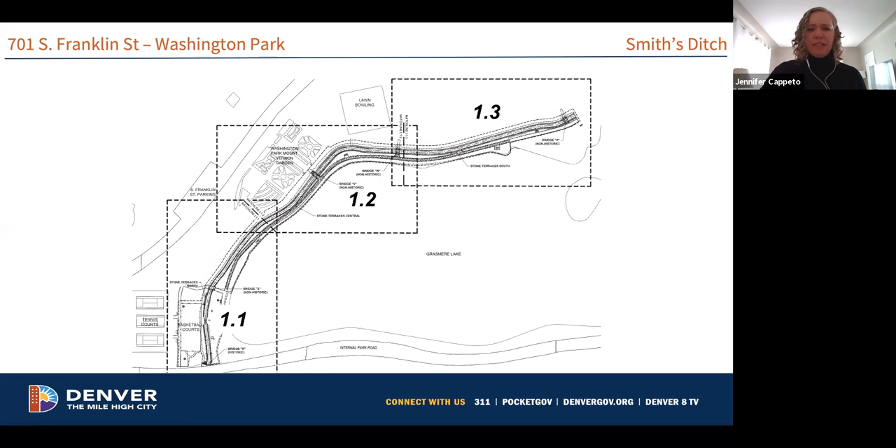Hi all, my name is Jennifer Cappeto. I'm a project manager with Denver Parks and Recreation, and I am the project manager assigned to the improvements at Washington Park for the city ditch.

And just real quickly, as Jennifer mentioned, the bridges are not historic. Bridge S, the one that you see in the top left, was designed in 1993. I don't have the actual construction date, but it was probably late 1993, early 1994. This form of bridge construction has worked out really well for operations, and it has been used as the design intent for the other 3 bridges being replaced as part of this project.

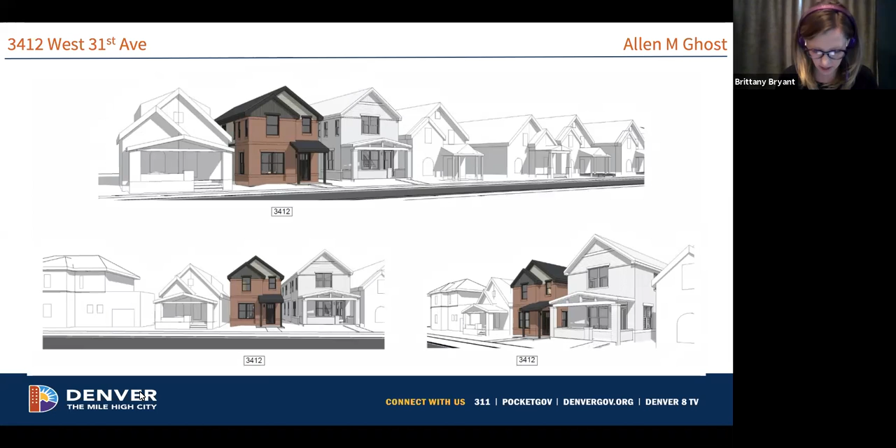Since the phase 2 submittal, the applicant has restudied the overall structure height. It was reduced from 28 feet 4 inches to 27 feet 5 3/4 inches. The pitch of the roof was reduced from a 10/12 pitch to a 9/12 pitch. The second floor plate was reduced from 8 feet to 7 feet 8 inches.

The porch roof was revised from a flat roof to a shed roof, and the plinth on the porch column was eliminated from the design in favor of a simple porch post.

The ground floor windows have been revised from a group of 3 to a group of 2. The second floor windows have been revised from a group of 2 to 1 single window, which is typical of the nested gable forms within the Allen M. Ghost Historic District.

Additional horizontal banding has also been added to the structure, as you can see in this rendering, and we'll look at it in further detail in the elevations. Landmark staff feel that the adjustments to the design have created a new infill structure that is compatible with the mass and scale of the Allen M. Ghost Historic District, and does meet the commission's conditions from the November 3rd meeting.

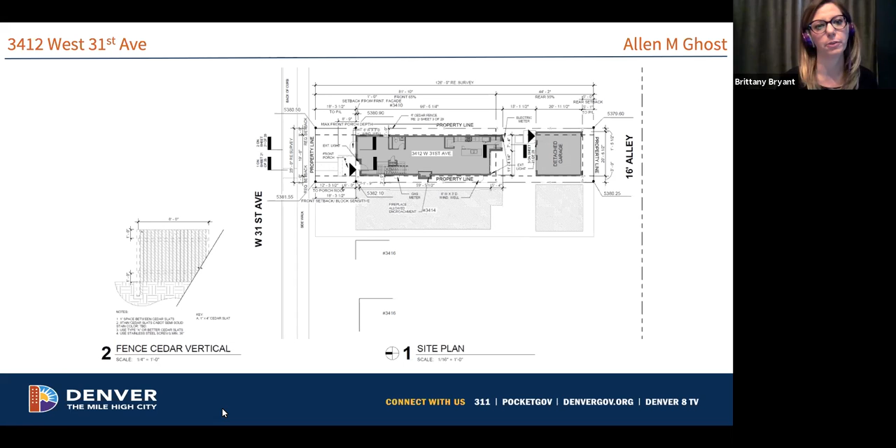So next we'll go to the landscape plan. Again, it's pretty similar - you can see the gas meters and electrical meters, but no notations on the placement of the HVAC units. You can see in the site plan a little bit better that proposed rear patio, which will be concrete, and the proposed front walkway, which will also be concrete. There is a fence proposed for the structure, and it does look like in plan that the fence on the south side of the project will be slightly forward of the front facade.

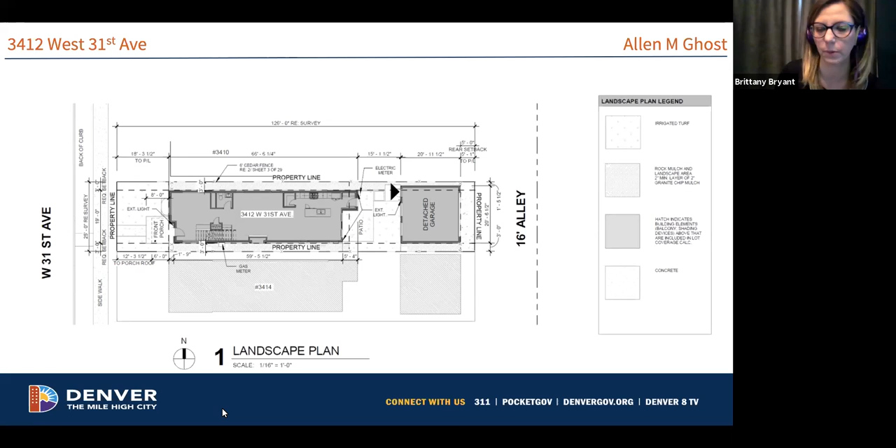There are no major changes to the first floor plan, so you can see that plan there. And then here we have the second floor plan and the roof plan.

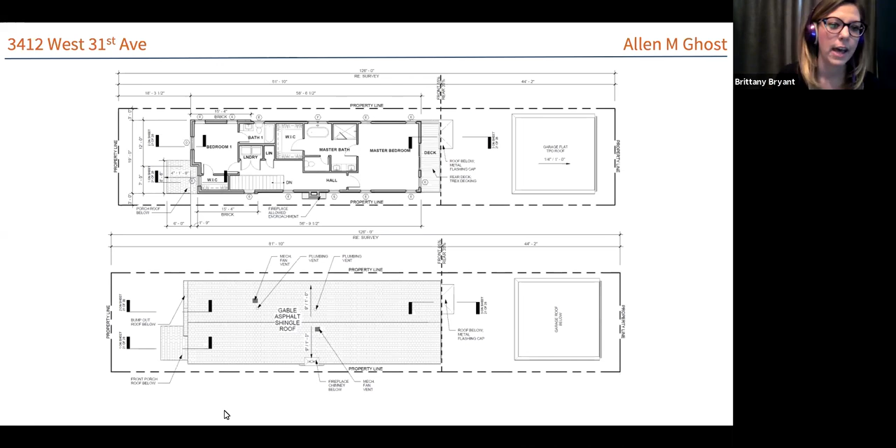The applicant has confirmed that the deck is totally within the front 65 of the lot, meeting the condition that it not be in the rear 35. The applicant has also provided a dimension for the porch, which is within typical ranges of the Allen M. Ghost Historic District. We have a simple gable roof clad in asphalt shingle, the mudroom at the rear will have metal flashing, and the garage roof will have TPO roofing material.

So this structure will be clad in brick on the front facades, and also at the mudroom. This brick is a general shale brick with a running bond pattern. It is a red brick structure, and it will have string coursing and windowsills typical of the Allen M. Ghost Historic District.

In the gable faces we will have vertical James Hardie siding and horizontal James Hardie siding to provide some interesting accent there. Staff feel that this is a modern interpretation of the decorative fish scale shingles you see within the Allen M. Ghost Historic District, a modern interpretation of that application of shingle work in the gable face.

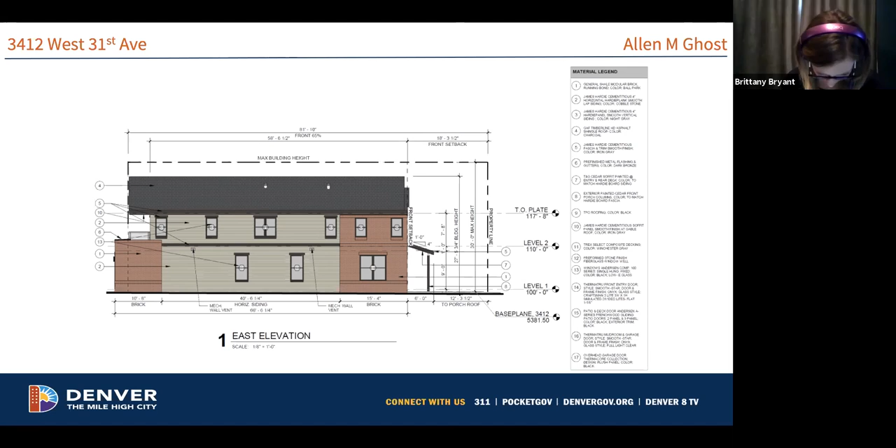All the windows you can see here are a 1/1 window and they are Fibrex composite. Fibrex composite is something we allow on new infill construction but not on the historic structures. So the windows are appropriate for this new project, but it's not a window material we typically allow on the historic structures.

You can see that mudroom will be clad in brick at the rear and that lap siding on the secondary facades. On the west elevation, the chimney will also be clad in that same brick cladding, but similar to before, the brick only wraps 11 feet 4 inches on the secondary elevations, which is often typical of new infill construction within our historic districts.

The garage structure is just going to be clad in that lap siding, again that smooth finish Hardie product with a 4-inch reveal to match the primary structure. There are horizontal windows on the garage; they face the interior lot and are not visible from the public right of way, so staff were not concerned about those windows as they will not be visible from the public right of way.

Here you can see the materials proposed for the project. Again, that modular brick is a ballpark brick we've approved several times for use within the historic districts. The Hardie product, both horizontal and vertical application, the asphalt shingle which will be black, and then all of the color schemes.

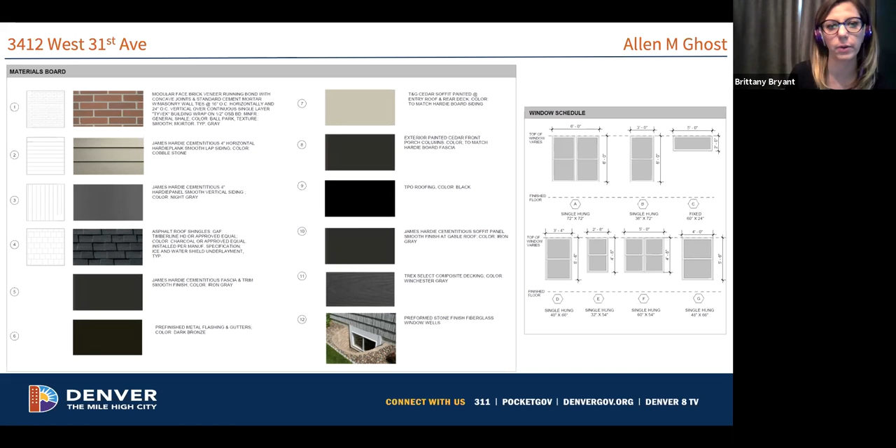Additionally, the egress window well material is a preformed stone fiberglass material. This doesn't have a contextual relationship to the cladding materials on the front facade, so we have concerns over that light well window well material proposed there. This is also proposed for the egress on the secondary elevation, which is at the rear of the project site and will be screened by the privacy fence, so we are not overly concerned with its application there—but on the front facade we would like to see a higher quality material.

Here we just have some section details of the proposed project. The column size is not noted in plan, however it does seem proportional to the project and to other nested gable structures within the Allen M Ghost Historic District. You can see that shed roof that is proposed.

Here we have a section through the nested gable that also shows the light well on the front facade—I keep referring to it as an egress window, sorry. And then a section through the rear deck, and a rear deck elevation.

When putting together my PowerPoint presentation, I noticed that the application for 3414 is missing the rear deck elevation detail for the cable railing that is proposed, but it is the same cable railing, so they will need to include that detail in their submittal for 3414 as well. You can see it here in this submittal, but we won't have it in the next submittal.

Here we have all the window sections through the various materials. Since we have changes in materials, the windows are proposed to be inset at least 2 inches within the brick portion of the building, where the nested gable transitions into the Hardie material, and also 2 inches into the secondary elevations where it is all just cladding material. This has been an issue in the past when changes in material make it unclear that windows will be inset, creating issues at final CO. The applicant has provided all those details and confirmed the windows will all be inset 2 inches within all materials on the facade.

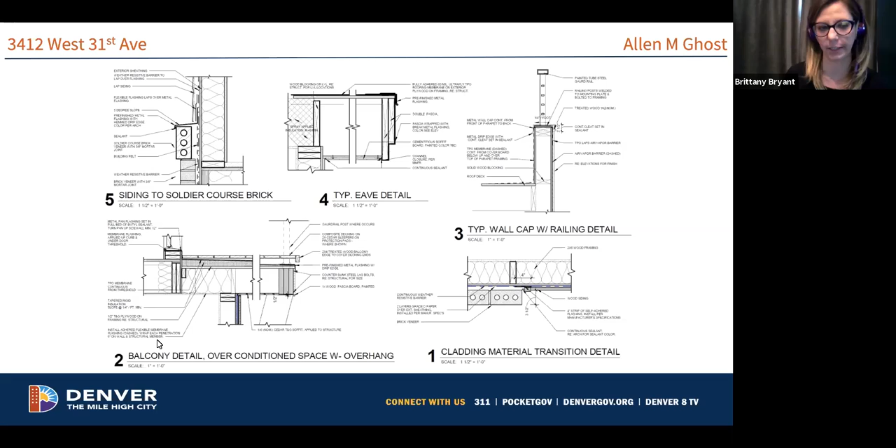Here we just have some more section details. You can see the cladding material transition that will occur on the secondary elevations between the brick facade and the lap siding material. You can see the soldier coursing details proposed for the facade, and again another railing detail and balcony detail that is proposed.

So staff are recommending conditional approval of this project, as we feel the changes made have significantly improved the project, and it is compatible with the Allen M Ghost Historic District, with high quality materials used for this infill construction that we often see within our historic districts.

However, we do have some conditions. Show the location of the HVAC equipment and ensure it is in the rear of the property. Provide a height dimension for the proposed fencing and ensure that it is no taller than 6 feet in height. Set fencing back 1 foot from the primary facade. Use a higher quality material that relates to the front facade cladding material for the light well. Revise the proportions of the light well window on the front facade to have a proportional relationship to the windows above, and use a smaller casement style window to reduce the height of the light well on the front facade. Thank you, Brittany. Commissioners, do you have any questions for staff at this point?

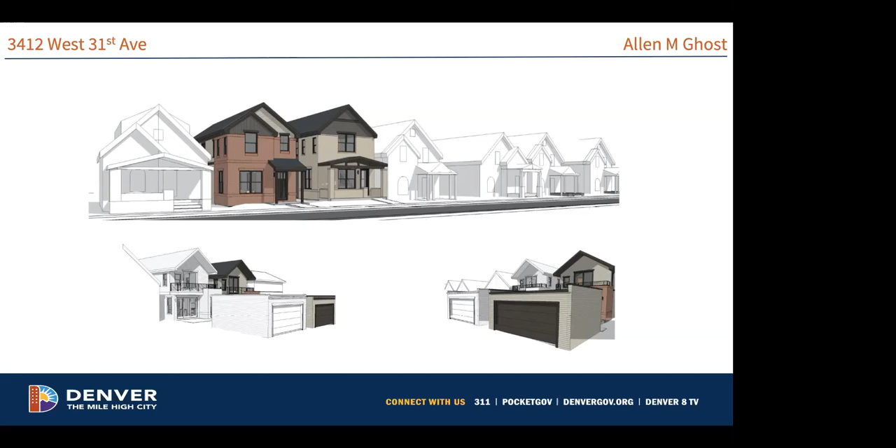So other than that, ready to hear your comments. All right. Okay, Dave, thank you very much.

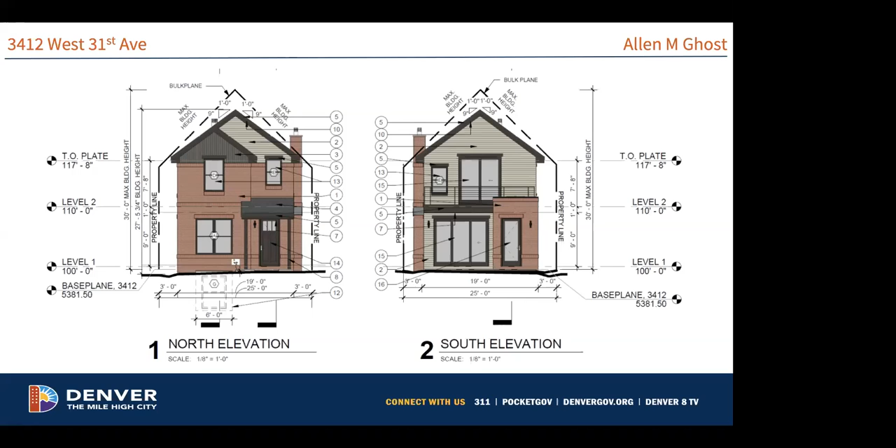Brad: I have one question. The vertical siding that's on the front facade, the photo just looks like a flat panel siding. What's the spacing on that? Is that like a 4-inch and then a vertical, or what is that exactly? Correct, it'll be a 4-inch vertical to match the 4-inch horizontal of the lap siding. Thank you.

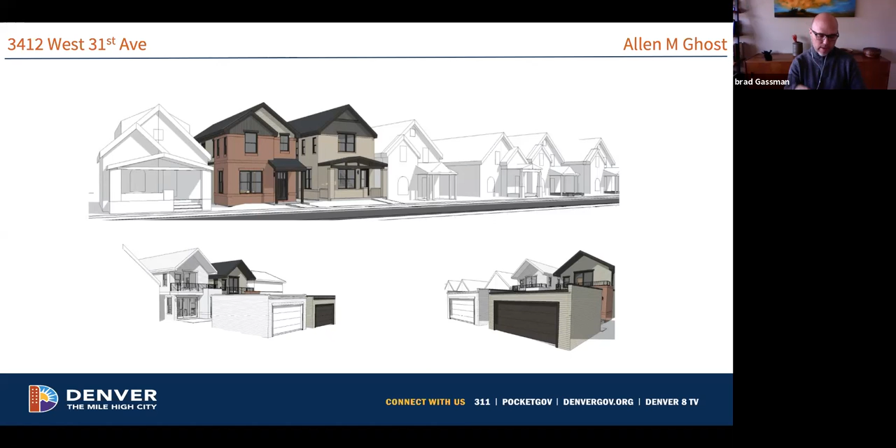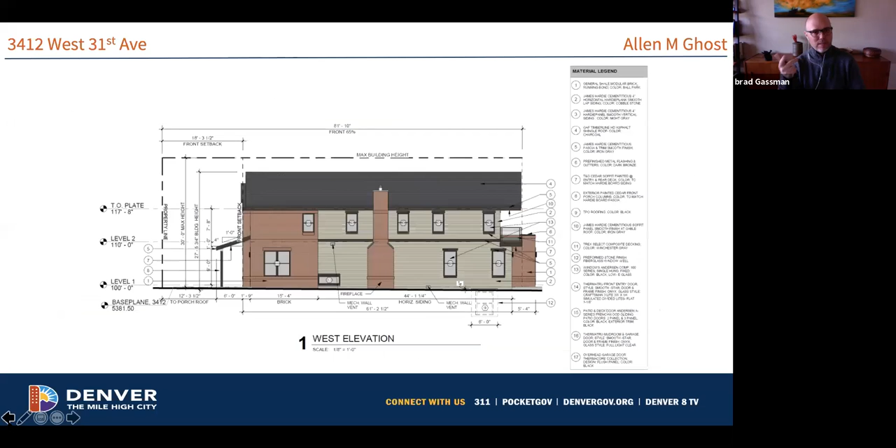Okay, all right. What were your thoughts on the window, Brad? Well, I guess my question was, it's just not a visible component of that front facade. So it seemed that staff's comment about a higher quality window well material is very accurate—there's some opportunities there—but I was less concerned about the actual window itself because it's not visible. I understand the comment as it relates to the overall facade, but it's really an element that's not visibly seen as part of that facade's composition.

Gary, did you have any thoughts about what Brad just said?

I agree with what Brad is saying. I think visibility is maybe going to be more prominent because the site is relatively flat there and the buildings are relatively close to the walk. So it will be visible, but I don't think it'll be obtrusive.

I do think that the window well material needs to be improved upon. It should not introduce yet another kind of texture or material to the ones that are already proposed for the building itself. So I think that's a concern.

As far as the size of the window is concerned, I guess I'm okay with the size that's proposed. If it was smaller, it would be better, but I don't have a strong objection to what's shown in terms of size.

Okay. What are others thinking? Are there any other elements in this that anyone has any trouble with? For instance, the sliding glass doors, or any concerns about any of that?

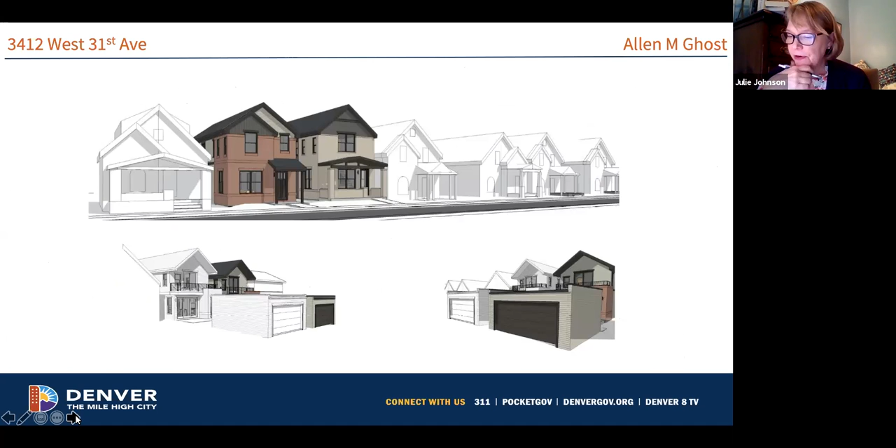So now we go to 2020-COA-439, 3414 West 31st Avenue, and Brittany is up yet again.

Our next project is at the same site, which again went through a similar process with the commission, in which the existing structure was approved for demolition on August 18th, and a zone lot amendment was approved to create 2 buildable lots that are 25 feet in width. The commission then reviewed the Phase 1 mass form and context submittal at the November 3rd meeting, and conditionally approved that with the following conditions.

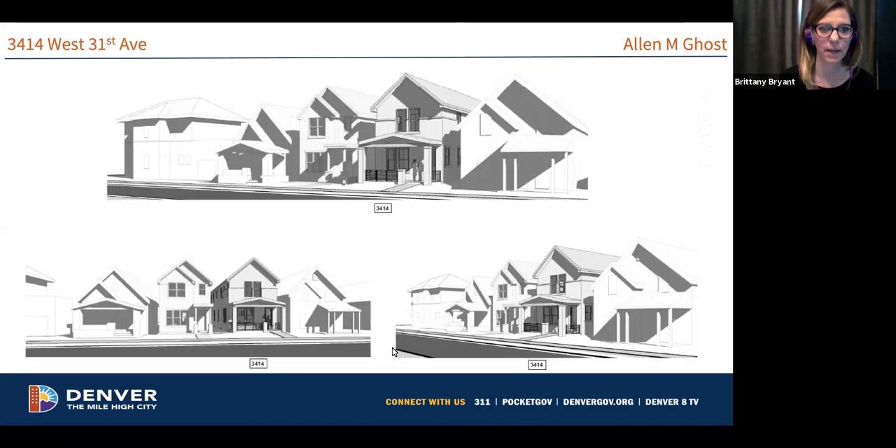That the height of the overall, the max height of the structure is clarified in the Phase 2 submittal. The overall structure width to remain 19 feet. Restudy the window proportions on the facades, restudy the porch wall design, and restudy the horizontal articulation of the structure. So here you can see the Phase 1 submittal for this structure, and here is the Phase 2 submittal showing how the structure has changed.

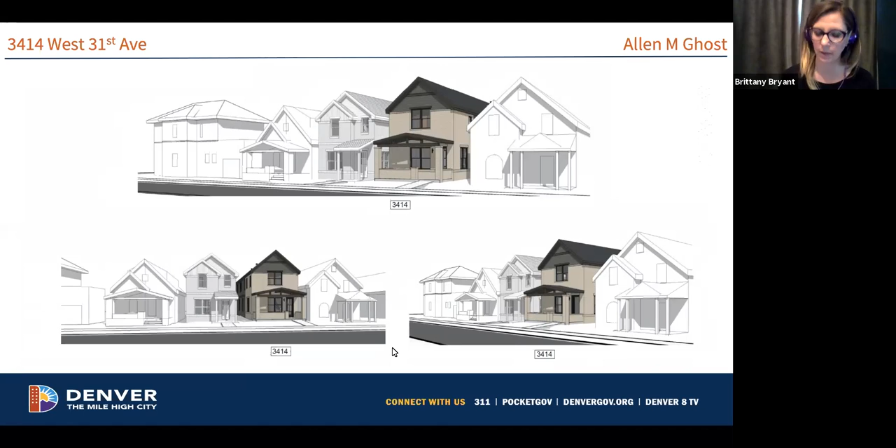So the applicant has clarified that the max height of this structure is 28 feet 4 inches, and it was previously shown at 27 feet 6.5 inches. During commission discussion of these projects, the commission indicated that some variation in height between these 2 structures would be typical of the Allen M. Ghost Historic District and create an interesting street wall there. So staff didn't have major concerns over the increase in height for this structure.

On the ground floor, the windows were shifted to the west to align with the second floor windows, and then the window proportions on all elevations were restudied to be more similar to each other. The porch roof pitch was also reduced in this submittal, and the porch wall was revised from a cable design to a solid brick wall. A limestone foundation course was added to the front facade, and a fiber cement course to the secondary elevations, to add additional banding to this facade and break up the massing a little bit.

Landmark staff are concerned about the shift in the front facade ground floor windows to the west and the change in the porch roof pitch. In the Phase 1 submittal, the ground floor windows were centered on the dining room wall, and now they have been shifted to the west, so they are a little asymmetrical on that ground floor facade. We would recommend that they be shifted back to their original location to be similar to the Edwardian form that this structure is pulling inspiration from within the Allen M Ghost Historic District. You can see an example of this in your packet at 3395 West 30th Avenue.

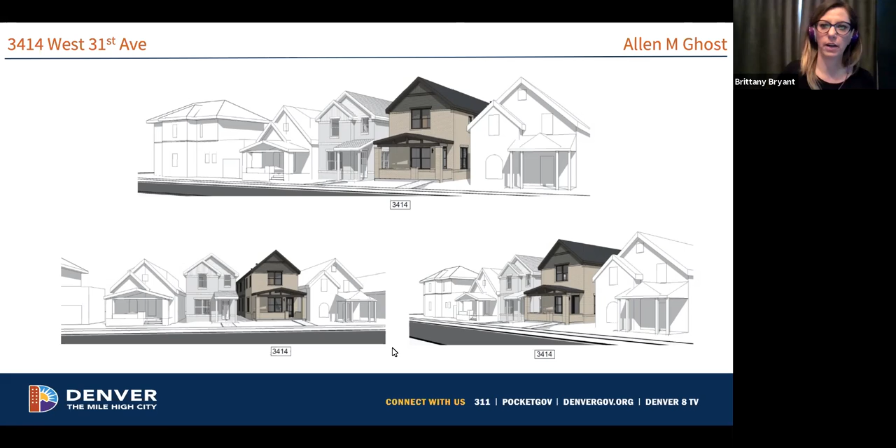In the phase 1 submittal, the porch roof was just below the second floor windowsills. The revised porch roof pitch is a much shallower one, creating a greater void between the porch roof and the second floor windowsills. Staff would recommend a return to the steeper pitched porch roof for this structure to be more typical of the Edwardian forms that this structure is pulling inspiration from. We can see that a little bit better in elevation, so I will just move on.

So here we have the proposed site plan. Similar to the last project, we do see the electrical meters and gas meters noted, but the HVAC systems are not noted in plan. They will need to be noted in plan, and typically we do require those to be at the rear and have minimal visibility from the public right of way.

Additionally, the overall height of the fence has not been noted. Again, that needs to be 6 feet in height. Anything over 6 feet in height is considered an overheight fence per zoning. So we would recommend that that be noted and be no more than 6 feet in height. We would also recommend that the fence be set back 1 foot from the primary facade.

So here we have the landscape plan, again similar to the other project, where we'll have a concrete rear patio, a concrete walkway, and a concrete porch foundation. There's been no change to the overall length or depth of the structure on the lot, and the applicant has confirmed that the structure will be 19 feet in width.

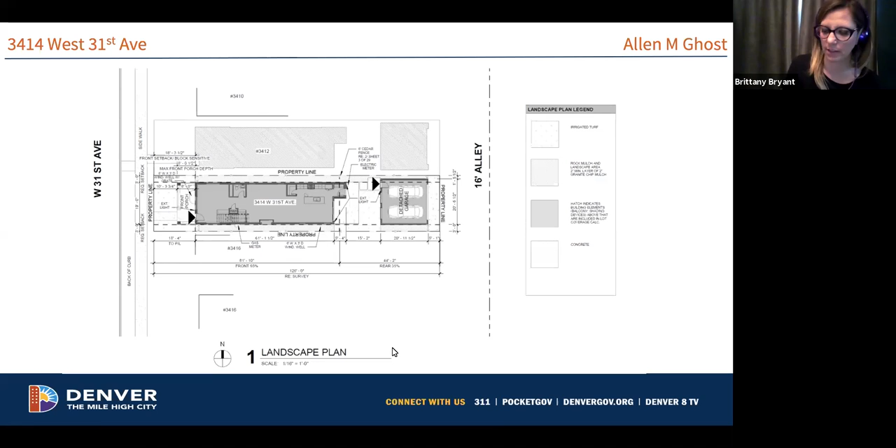Here we have the basement plan. Similar to 3412, there will be a light well window on the front facade to provide light into the rec room for this structure. However, this is slightly different from 3412, as this light well window is actually located in the porch foundation, which is really atypical of development within the historic districts. So we do have some concerns over that placement.

Again, zoning doesn't allow light wells to encroach into the side setback, but egress windows are allowed to encroach in the side setback. So you do see an egress window on the secondary elevations at the rear.

Here we have the first floor plan, and you can see that those windows for the first floor are not centered on the dining room that is identified as that program for that area. Staff would recommend that these ground floor windows be recentered on the dining room to be more typical of the Edwardian development within the Allen M. Ghost Historic District. And then you can see that light well that is in that porch foundation.

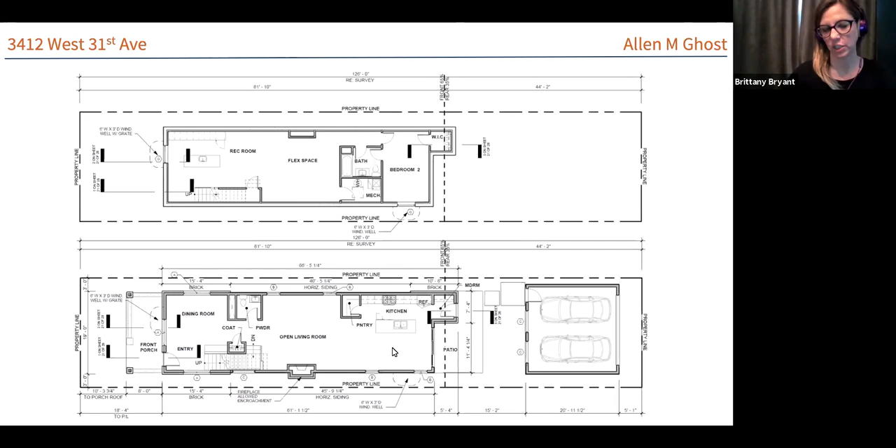So here we just have the second floor plan. The second floor windows are centered on the facade, which is typical of the development. The applicant has confirmed that the deck is totally within the front 65% of the lot.

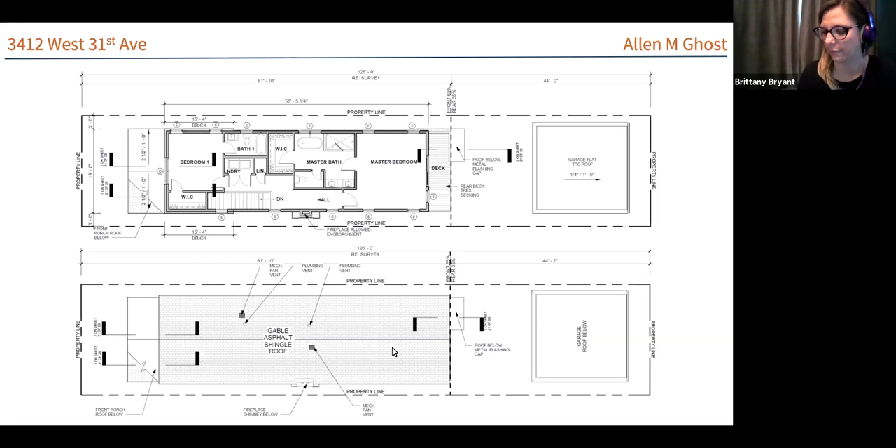Similar to the last project, the roofing will be asphalt shingle, and the mudroom will have metal flashing, and then the garage roof will have TPO roofing material.

So here is the phase 1 submittal that the commission reviewed. Again, I have pulled this in so that the commission can see the revisions to the design and the changes made to the project proposal.

So here you can see that the ground floor windows and second floor windows on the front facade are not directly aligned. They are offset from each other, which is typical of the Edwardian development. And you can also see that cable railing that was previously proposed, and then that porch roof pitch that's just below the windowsill on the structure.

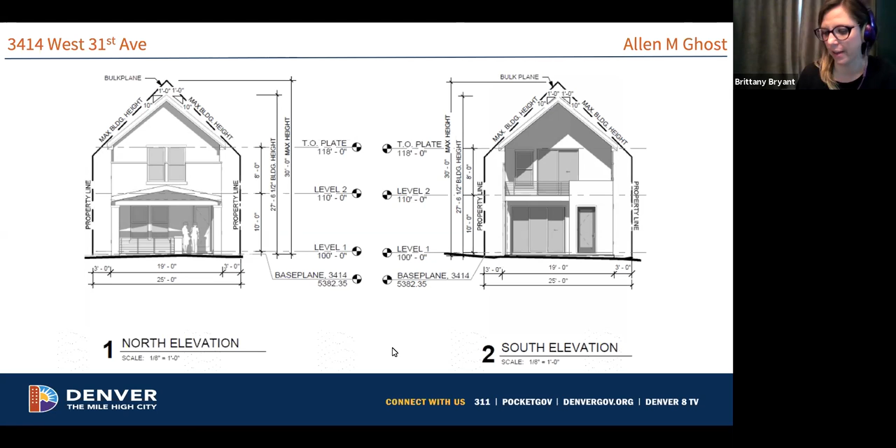And here we have the phase 2 submittal showing that solid brick wall, that shift in the ground floor windows to the west. Again, we would recommend that those be recentered on the dining room to be more compatible with the Edwardian development within the district. And then you can see that shallower roof pitch as well.

This structure will be clad in a blonde brick. This is a color that we have previously approved for new construction within the Allen M. Ghost Historic District.

And then within the gable face, the applicant will be using that same horizontal and vertical siding material to provide some kind of accent to the gable face. As you can see here, they're both 4 inches in reveal, and the rear facade will also be clad in that horizontal lap siding with a 4-inch reveal. Again, cementitious product, James Hardie smooth finish, with that mudroom also clad in brick.

The same sliding glass doors that you see in the previous proposal, and then also that cable railing that we don't have a detail elevation of in this submittal, which I noticed when I was putting together my presentation. So I'd also ask for a detail of that cable railing as well, so we can confirm that that matches.

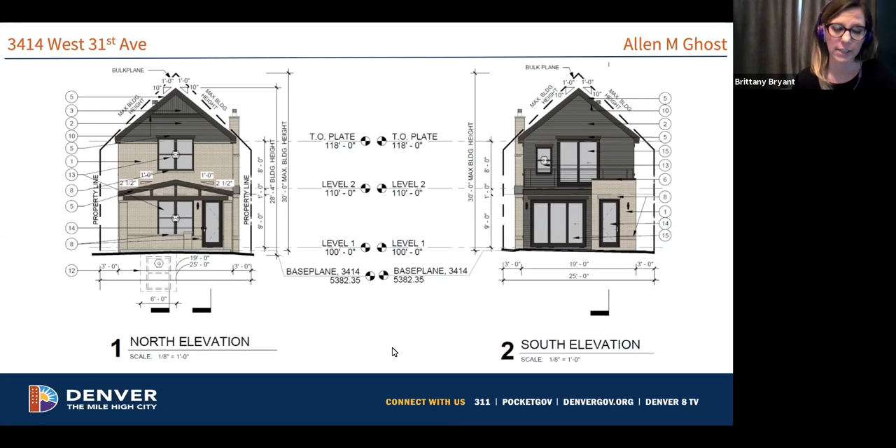Again, this will have a light well on the front. It's the same size as the previous light well, and is also proposed to be that fiberglass material. However, unlike 3412, you will not be able to see this light well window due to the solidness of the porch wall. But we would request that the well itself be a higher quality material that relates to the porch foundation or the front facade material, which we would suggest be concrete or brick to match the front facade.

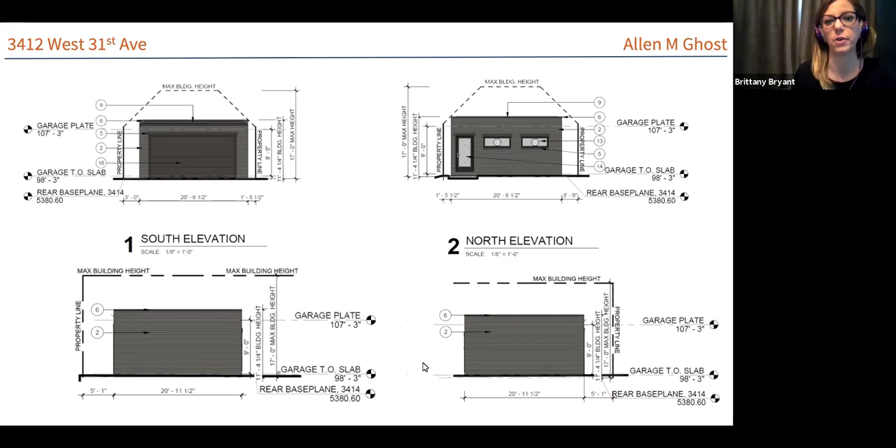Similar to the last project, the brick will wrap 15 feet 4 inches onto the secondary elevations, then transition into a lap siding material with that mudroom clad in the brick proposed for the front facade. The chimney on the west elevation will also be clad in brick. The secondary elevations have grouped windows at the front and single windows towards the rear, which is typical of the neighborhood. The garage structure is clad in lap siding with a 4-inch reveal, smooth cementitious product with horizontal windows on the north elevation facing the interior of the lot, so we did not have concerns over those.

Here you can see the materials that are proposed: that beige brick we have approved for new infill construction within the Ghost Historic District, that cementitious smooth product for horizontal and vertical siding, the black asphalt shingle, various paint colors, metal flashing, that fiberglass well proposed for both the light well and the egress window well on the secondary elevation, and the window schedule here.

Here we have sections of the proposed project, pretty similar to the last submittal, so I won't spend a lot of time on this, but we have a section through the entry. This porch is more of a craftsman style, which you can see reflected in this section with how it's supported. Here we have a section through the porch that shows that light well in the porch foundation, which is really atypical. However, you won't see this from the public right-of-way, but we would request that that well material be high quality.

Similar to the last project, we have sections through all of the windows showing the various materials, to ensure that all windows will be inset 2 inches into the facade, no matter the cladding materials. Here you have a section through the brick. This structure will have limestone sills for its windows on the brick structure, where the other one had soldier course brick sills, so that is a slightly different detail we see on this structure. But all windows will be inset 2 inches into the materials, which you can see here.

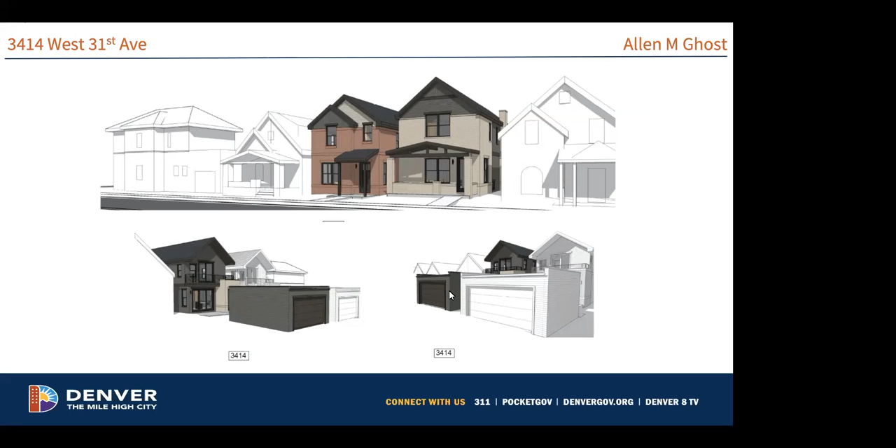And that's it. Any questions, I'm happy to answer. Okay, Dave, thank you very much. Commissioners, have you any questions for the applicant? Gary does. This is Gary.

I have a question about your window details. It's the second detail, number 2, on both sheet 22 and 23, where you have the limestone sills. It appears that there is a gap between the back of the limestone sill and the face of the sheathing and the window stool, etc. Your flashing is below the sill, okay, but it looks like there's a gap there that could actually collect water and debris and all sorts of things that I just don't understand why it's being detailed that way. Could you explain that, please?

Hi Gary, this is Dave. I noticed that when these popped up, that is just a graphical error. Those should be pulled back and the flashing should be coming over the top of the limestone sill. So that will be revised when we do any revisions with Brittany, if this is approved.

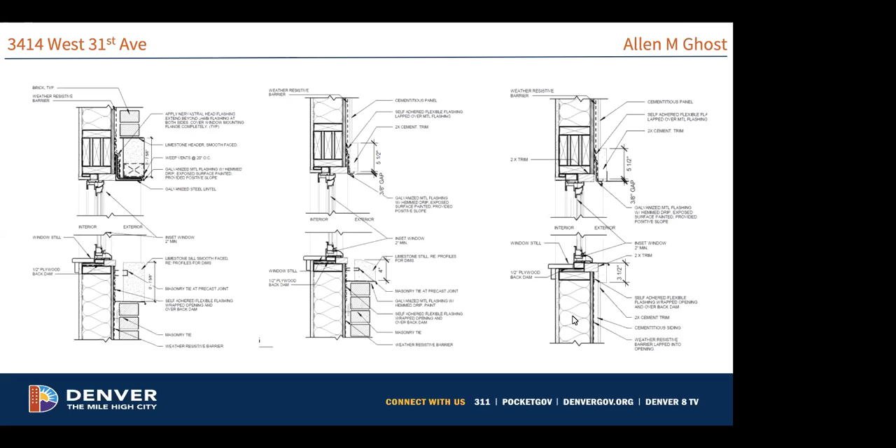Good, thank you. All right, thank you. Any other questions for the applicant? I don't see any. Staff, do you have any comments?

I would just request that you make the sill detail part of your conditional approval, just to ensure that gets captured. And then, as I noticed when I was putting together this presentation, this submittal is missing that elevation detail of the cable railing. So if you could add that to your conditions too, that would be great, if you're going to approve. Okay, all right, great, thank you.

Okay, so now's the point where anyone from the public is able to comment. Jen, are there any hand raises or anybody waiting on their phone? I don't see any. Nope. No? Okay, great. Seeing no public comment, then we will go ahead, commissioners, and go into deliberation.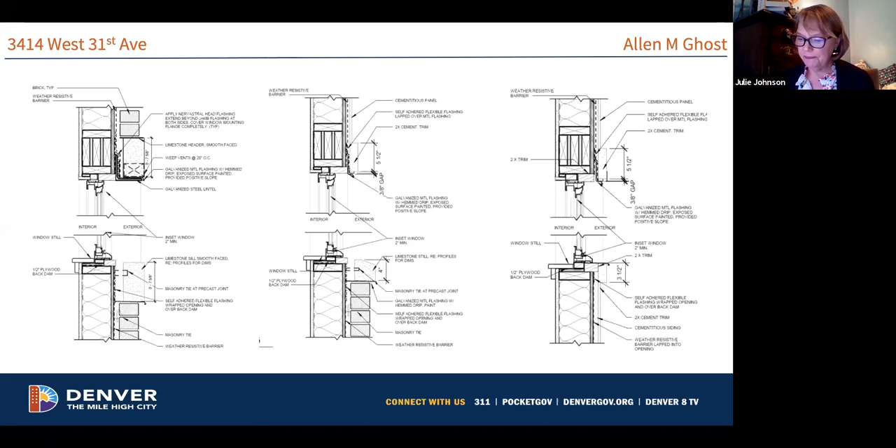So what are people thinking? I'll share one thought I have, which is that I think this raises an interesting question, as I was alluding to before, about visibility of the front facade, and whether our purview is restricted to considering what somebody would see from the sidewalk or street, or whether it might also be appropriate for us to consider visibility on the part of somebody who's walking up to the front door, whether that might be a delivery person or a neighbor or a friend or family.

I recall we had a bit of this discussion in a project involving Curtis Park a while back, where there was a window cutout area that was much more significant than this. I can't remember if it was all that perceptible from the sidewalk, but it certainly would have been very perceptible from the front door area. So maybe there's some precedent for this that I'm not recalling, but it strikes me as potentially worthy of discussion, just because it seems so unusual to have a window well within a front porch area. Yeah, I was thinking along those lines as well. What do the other commissioners think? Anybody else have any comments regarding that?

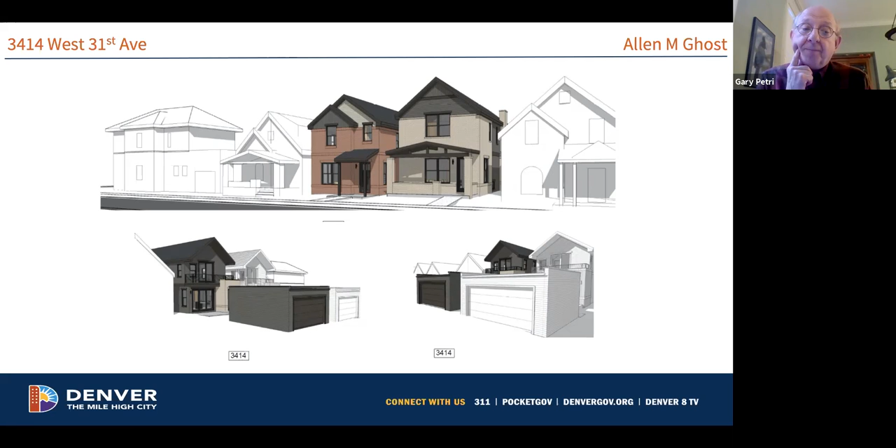This is Gary. I think it's unusual. I think it can be detailed in a way that it's not really visually obtrusive. It will have to have some kind of grate over it just for protection purposes, I think. But other than the fact that there's no historical precedent for it per se, I don't find it objectionable in this particular case, because it's partially hidden behind the wall, the porch wall. It's not really visible from the public way. I don't think it's obtrusive for visitors or public approaching the front door, whether it's the mailman or the express guy. I just don't have a big problem with it, other than the fact it needs to be a more concrete material, masonry material.

Yeah, thanks Gary. Anyone? Sounds like Jeanette was kind of raising the question of, should we even be worrying about this? And I guess the only thing that comes to mind as maybe comparable is a case where it was more of a landscaping issue, where the owner had landscaped the front yard, removed concrete sidewalk and stairs and sidewalls, but had also gone all the way up to the porch and redone the porch floor. And that was definitely part of the scope that we were looking at. I think of that as similar in the sense that this floor of the porch itself may not be visible to the street, but it was part of this overall concern about materials.

So I guess, if that's your question Jeanette, I'd say it seems like there's precedent to a degree of the commission looking at something like this. But I definitely agree with Gary too, that in this case I don't see it as an issue, but it seems like it would be better to just request that, especially since the applicant seems willing to change it to something like concrete that matches the slab. Okay, anyone else? Anne, did you have any thoughts?

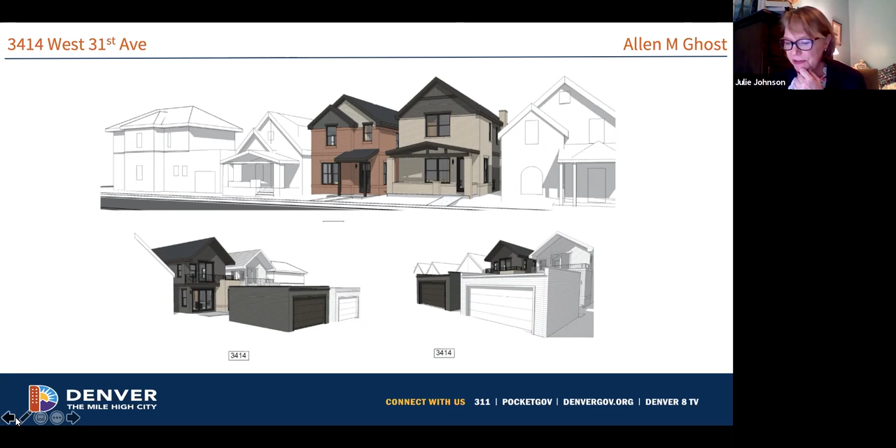All right, so let's talk about the pitch of the roof of the porch. The project manager has told us that's a waterproofing issue. What do the commissioners think? Gary? I'm okay with it. Yeah, I was okay with it as well. Anybody else? This is Brad, I was okay with it as well. Any other concerns, commissioners?

And the windows, I was concerned about the windows, as was staff, but apparently we've figured that out with the project manager.

Let's see, can we talk about the front door? I would like to hear. Absolutely, Erica. I was looking at my notes. Let's talk about the front door then. I don't think I've participated in review of a non-historic infill project that had a full light door, so I'm just curious what other commission members' thoughts are.

Okay, Gary? For houses built in the 20s, a so-called 3/4 light door could be common. This is a full light door, but the difference between the 3/4 light doors used in the 20s and this full light door is maybe 6 inches or so of a wider bottom rail. As far as I'm concerned, I don't have a problem with what's been shown. It would be a bit better if it had a wider bottom rail, but I'm not going to object to what they're showing.

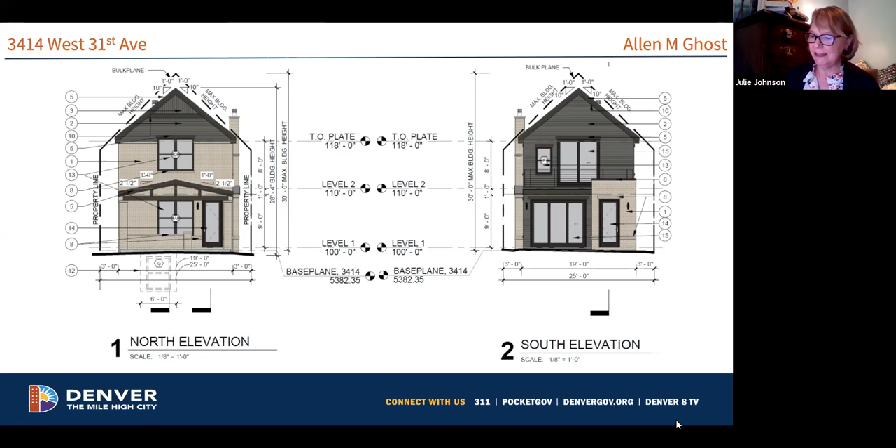And now we're on to 2020-COA-440, which is 101 Race. And it's Brittany.

Our next project is at 101 Race Street. This is also a phase 2 design detail review for a new infill project within the Country Club Historic District. This project was originally reviewed by the Commission for a zone lot amendment on August 18th. This is a vacant site within the Country Club Historic District. The Commission also reviewed the phase 1 mass, form, and context submittal at the November 3rd meeting. During that meeting, there was discussion about the existing site wall on the south and making sure that details were provided on what would be proposed there.

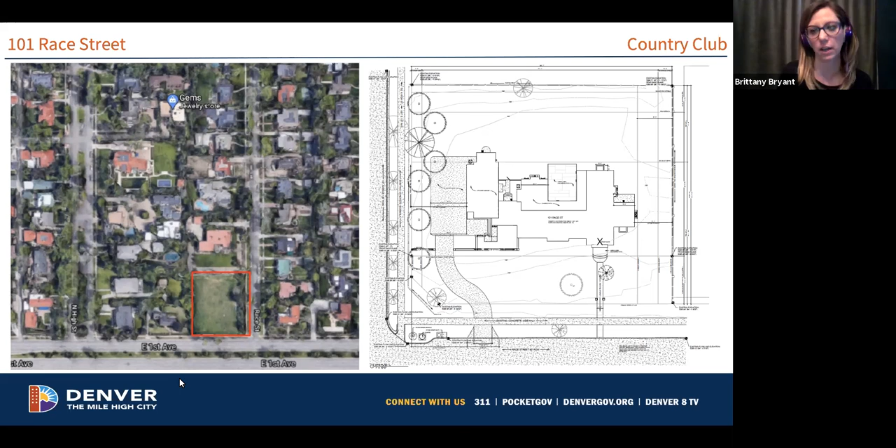So here you can see the site. It's that very large site right at the corner of First and Race Street. And here is the project sited on the site. It will have a driveway accessed from Race, as this particular block of Country Club does not have alley access, so you can see that in this proposal.

The Country Club design guidelines do suggest that walkways should be distinguished from driveways, so we're not concerned that the driveway is concrete and the walkway is stone, since that is what's suggested by the guidelines. We are concerned that the site plan shows different materials for these areas.

Additionally, on this landscape plan, there is an egress window on the north side of the project site that is not shown in the same location as the site plan and floor plans for this proposal. This landscape plan also shows a fountain, and it shows that the existing site wall on the south of the project will be increased in height, but staff do not have details on the existing height of the wall or how much it will be increased.

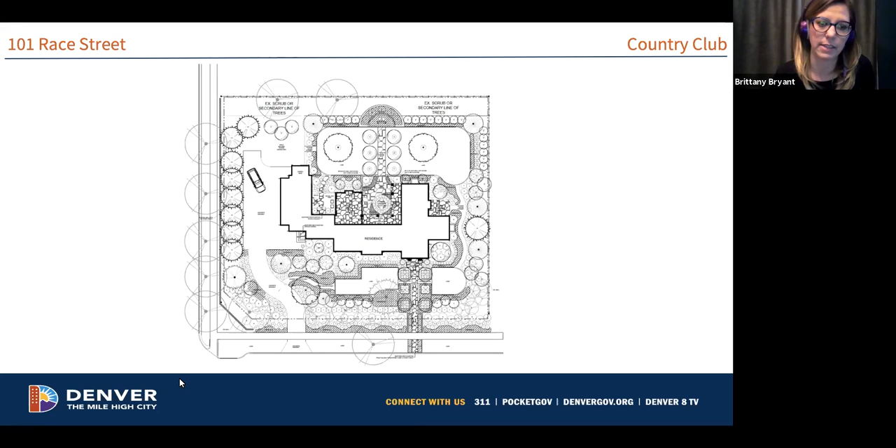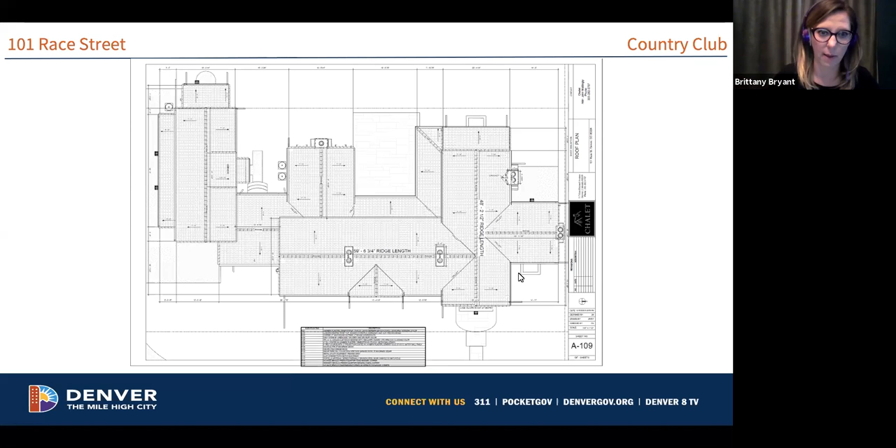It does have projecting bays on the structure. Those projecting bays do not have any overhanging eaves. We typically require 6-inch overhanging eaves when we are talking about roofs within the historic districts. However, when I was looking at the comparison structures in this district, I noted that the Mediterranean style development this is inspired from, when it has that kind of projecting bay, you don't often see that overhanging eave. So I wasn't particularly troubled by that not being a detail on this structure. And again, that's just on those two forward projecting bays - the eaves do overhang on the primary ridge of the roof.

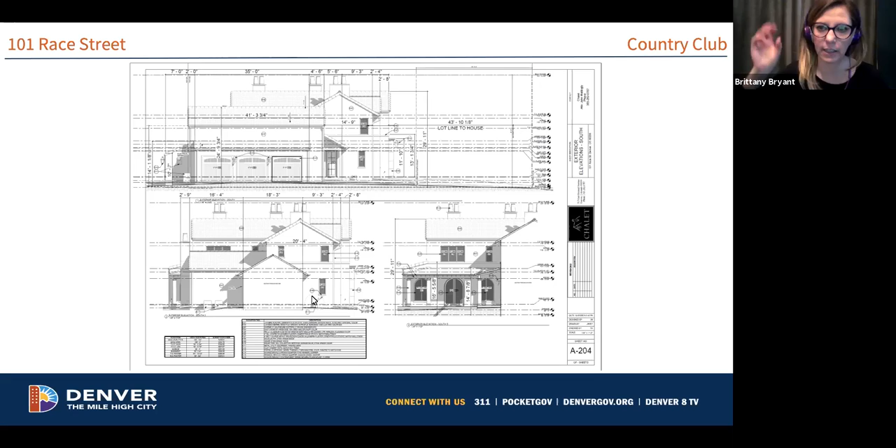Throughout this packet, there are some material notations that overlay each other that just need to be cleaned up by the applicant. There's a few on the rear elevation for some of the light fixtures, and on the front door there's some overlaying of material notations that need to be cleaned up. Also on the front facade, a dimension runs right through a material notation, so we would ask that that be cleaned up as well by the applicant.

We do require a genuine 3-coat stucco, and based on the details in elevation, we speculate that the applicant is proposing a genuine 3-coat stucco. But the manufacturer spec provided by the applicant comes in various applications, including a 2-coat application, which is not something we allow. So the applicant needs to clarify the proposed stucco detail in this packet.

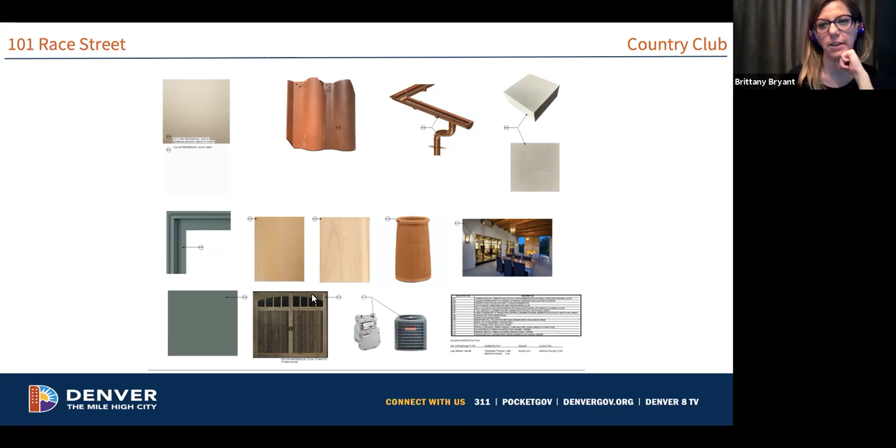Here you can see the tile that is proposed with two colors, the red and the burgundy tile. The chimneys will have clay chimney caps, which you can see here. You can also see the aluminum clad material proposed, the wood garage doors, and some wood accent materials for soffits and rafters and such.

However, on this page, some of the construction details are a little confusing. We believe the structure is proposed to be stucco, but some of these section details note brick construction, so that needs to be clarified by the applicant on this page of the section details. Here you can see the precast column located in the rear, those wood rafter details, and some of the eave details where I mentioned some of the eaves are not overhanging eaves and some of them are.

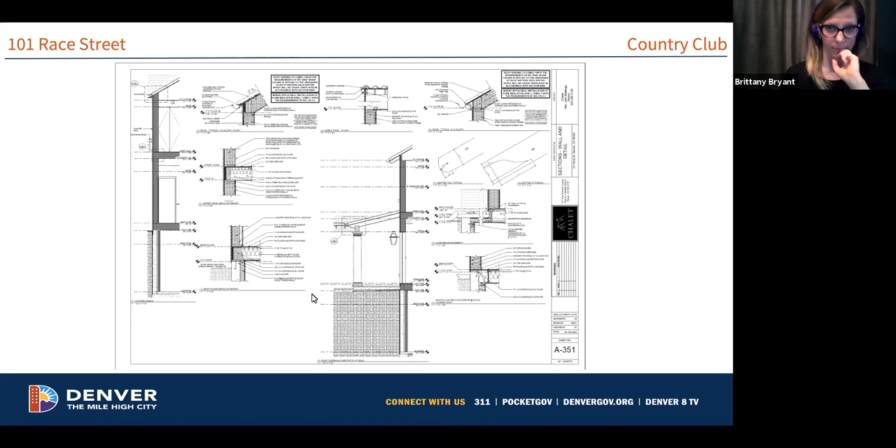And that includes clarity in the landscape plan and site plan not conveying the same level of information. In elevation, all fixtures are shown as a lantern style. The correct style light fixture should be shown, and its attachment detail should be shown as well.

On page A101, the covered patio at the rear is noted as garage on slab above grade, but that's just that rear covered patio, so that needs to be corrected in the plans. On page A201, there are two overlapping keynotes pointing to a door. These overlapping keynotes need to be corrected, as I've previously mentioned.

Again, we have concerns over the stucco specifications, and whether that is a genuine 3-coat stucco or the stucco provided in the manufacturer spec that was submitted. The coloring and pattern of the two-color roof has not been provided, so we have a number of concerns over the application materials.

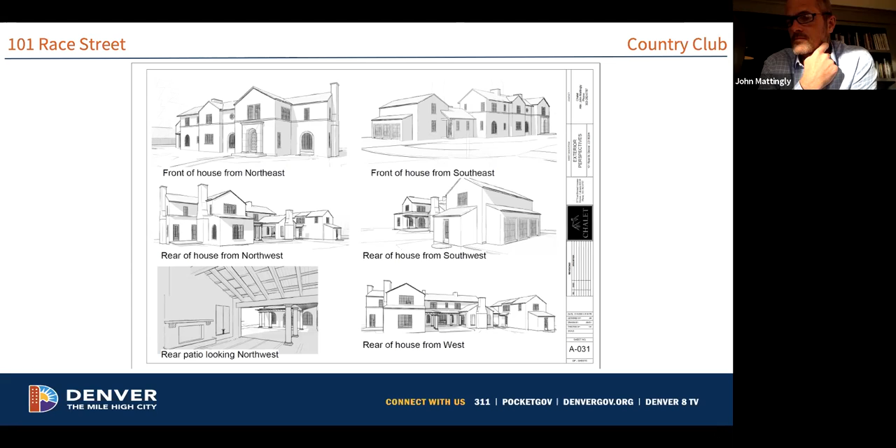Okay, any other questions for the applicant, commissioners? Gary, did you have something, or was I wrong? No, okay, all righty, I don't see any other questions. John, thank you very much. I don't see any other questions from the commissioners, so thank you for your comments.

The next would be any comments from the public. Jen, have we seen any comments? Anyone? I don't see any hands raised, okay, and there's no phone numbers. All right, okay, seeing no public comments, let's go ahead and go into deliberation.

Commissioner—Brittany, I'm sorry, did you have some staff redirect? I just wanted to state we didn't recommend conditional approval of this project, as we felt it was too many conditions. But if that's the direction the commission wants to go, I'm more than willing to hear that out and try to get all those. Yeah, thank you for that, Brittany.

I appreciate it. All right, commissioners, what are your initial thoughts? We've got two different motions—what are the thoughts about the different motions, Gary? Well, I was just going through the staff analysis, and I think for a conditional approval, I was up to 9 conditions, and I think that's just too much. I think the most favorable response we can give to this applicant is a continuance, especially since they already know what's needed and can provide it in a week.

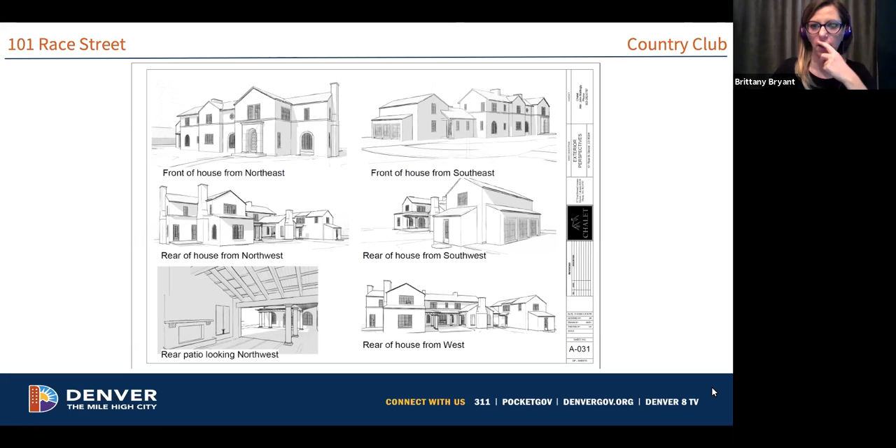Jeanette, did you have anything? No? Okay. Brittany, do you have enough from the commissioners about the roof tile discussion to chat with the applicant? I think the suggestion from Gary, that they provide an example of the blend installed on a roof somewhere, doesn't have to be in Colorado, can be anywhere, with these two colors, would be great, so the commission can see what that looks like. That'd be great. Thank you very much, Brittany.

All right, commissioners, is there a motion from the floor? I'll make a motion. Madam Chair, I move to continue application number 2020-COA-440 for the new infill construction phase 2 design detail review at 101 Race Street to February 2nd, 2021, as per presented testimony, submitted documentation, and information provided in the staff report. Is there a second? Second. Thank you, Gary. All right, thank you very much.

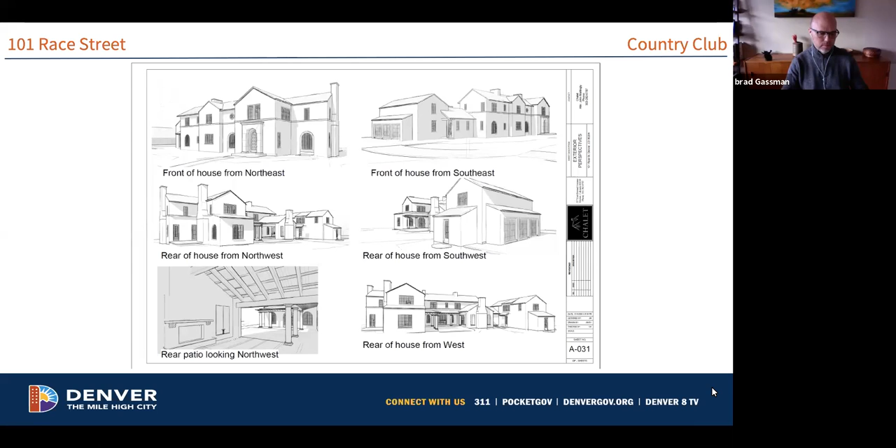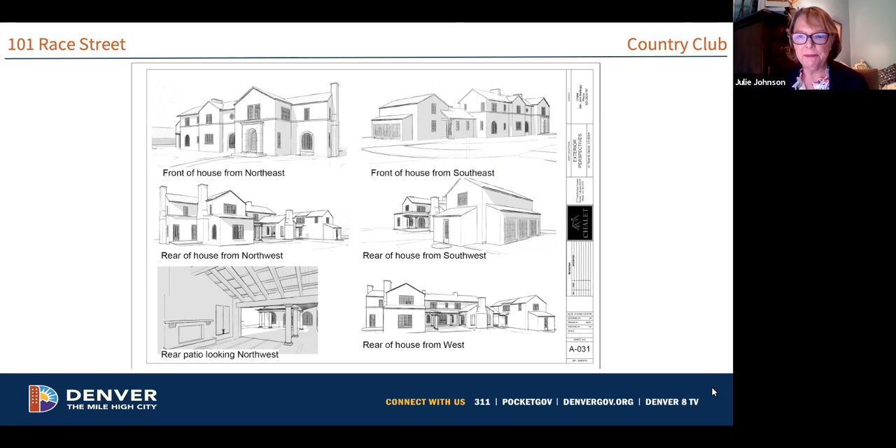Let's do a roll call vote then. Jeanette? Aye. Brad? Aye. Erin? Aye. Gary? Aye. Erica? Aye. Ann? Aye. And I will also vote aye. Julie votes aye. The motion has passed, and so the applicant will be in touch with Brittany, and we will see that project come back to us on the 2nd of February.

Thanks very much, Brittany. And speaking of Brittany, guess who's up next? It's 2020-COA. Oh, guys, we've been at this for a couple hours. Does anyone need a break, or shall we power through? Any thoughts? Power through? Okay, cool. Yep, awesome. All right.

2020-COA-441, 620 Clayton, and Brittany. I believe this is our last design review application for the day. This is at 620 Clayton Street, which is a contributing structure to the East 7th Avenue Historic District. I forgot to indicate in this aerial which structure it is, but it's the one that is four houses in from the south. So here you have the structure.

So the applicant is requesting commission approval for site work, which involves reconfiguring their walkway into a straight path, and then replacement of the existing door that appears to be historic to staff, and the existing pediment door surround to the structure that you can see in this photograph here. Previously, the commission has reviewed and approved the replacement of the steel casement windows that were originally on the structure with new windows that you can see in this photograph, a 2-story rear addition, and then administratively staff have approved some site work at this site that involves the rear yard.

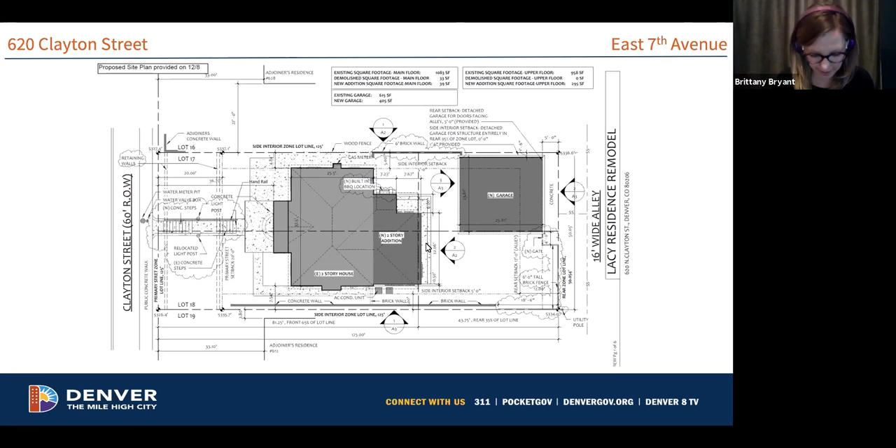Additionally, this house, as you saw in the photograph previously, sits very high on a hill, so you won't see some of that concrete paving that is proposed around the site. Our guidelines do suggest that when there is not a front porch, a patio adjacent to the front door is appropriate. So it looks like that is all pretty similar to the existing condition, just a small expansion of it. We're not overly concerned with that reconfiguration.

They will also be relocating some of the existing site lighting, which you can see noted in this plan set here.

What we do have some concerns over are the proposed pediment replacements. Our guidelines do talk about replacing architectural elements when they have deteriorated beyond repair, and only replacing those pieces of the elements that have deteriorated beyond repair versus whole-scale replacement. So the applicant is requesting whole-scale replacement of the pediment surround, which you can see in this photograph here.

The existing pediment surround has a pilaster design with fluted pilasters that have a square base and top. There are dentils located in the pediment, and then it has a broken pediment with an urn design. The proposed replacement design does appear to have more of a round base and cap for the fluted pilasters.

It's unclear to staff if the pilasters themselves are also proposed to be more of a round shape. And if you look at the pediment replacement design, it does not appear to have the same proportions as the existing pediment design, and those dentil details are missing. Within the entablature, the banding is at different locations in the proposed replacement design, and that broken pediment does appear to have more of a finial versus an urn detail on it.

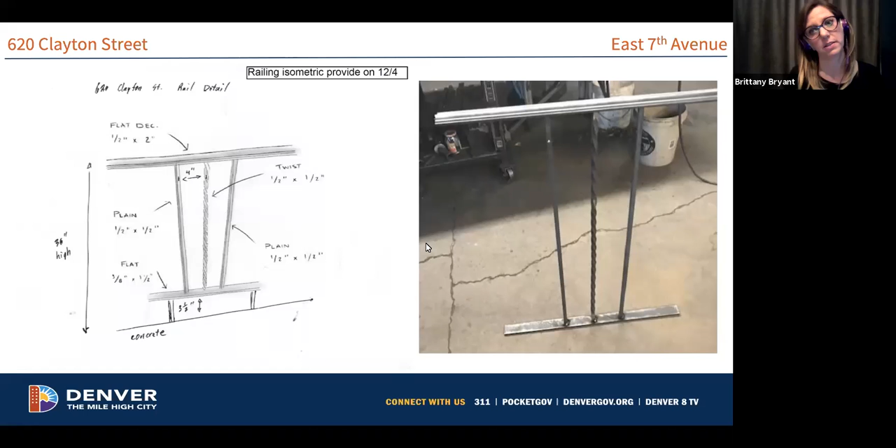The extent of the proposed site work has become somewhat clearer to staff with the submittal of the proposed site plan, and we don't have major concerns over the site work. But we are very concerned about the pediment surround and door replacement in this project request.

Thank you, Brittany. Commissioners, do you have any questions for Brittany?

Erica: Yeah, I noticed that the new site plan does propose retaining walls in the front yard, and I was wondering your thoughts on that, Brittany.

I don't have details on that. I'm not sure if you were on the commission at the time, but we had a robust discussion about retaining walls on East 7th Avenue, and the actual designation application materials do talk about using retaining walls in this district to use that front yard as public gathering space. So once we discovered that, we've been a little more flexible with retaining walls within the East 7th Avenue Historic District, provided that they have materials similar to the primary structure.

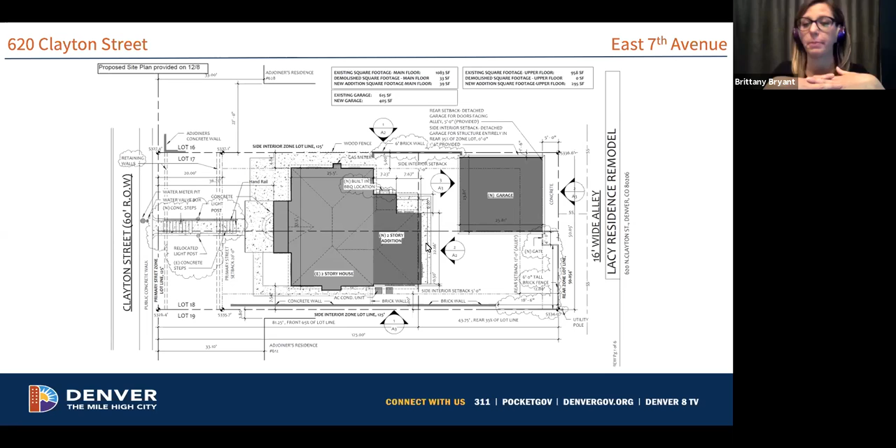We need all the details on that to ensure they're not changing the grade of the site more than a foot, because that is not allowed per zoning. So I would need additional details on that retaining wall proposal as well. I just don't have that information at this time to make a good assessment of the retaining wall proposal. Thank you. Thanks, Brittany.

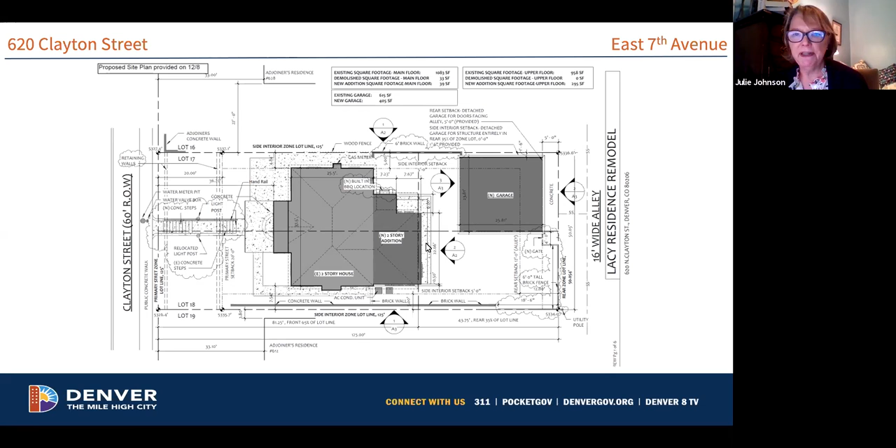Anyone else? Any commissioners? Any questions for Brittany? All right, I'm seeing none.

Jennifer, is the applicant present? Or Jen? Yep, it's all good. The applicant is present, Emily's moving him over. Great. He's in there. Okay, great.

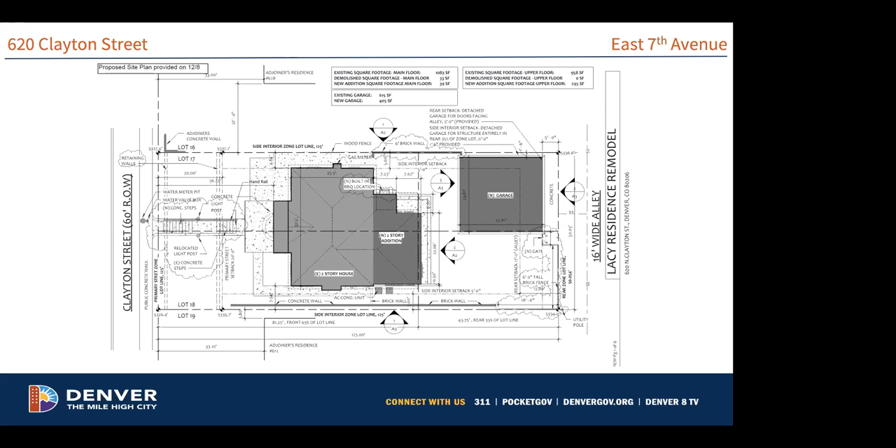Can you hold on one second, Kurt? Yeah, sure, there's an applicant presentation. Do you need me to pull that up, Jen? Or do I? Yeah, sorry. Do you have it? No, I got it. Sorry about that. Oh, great, thank you.

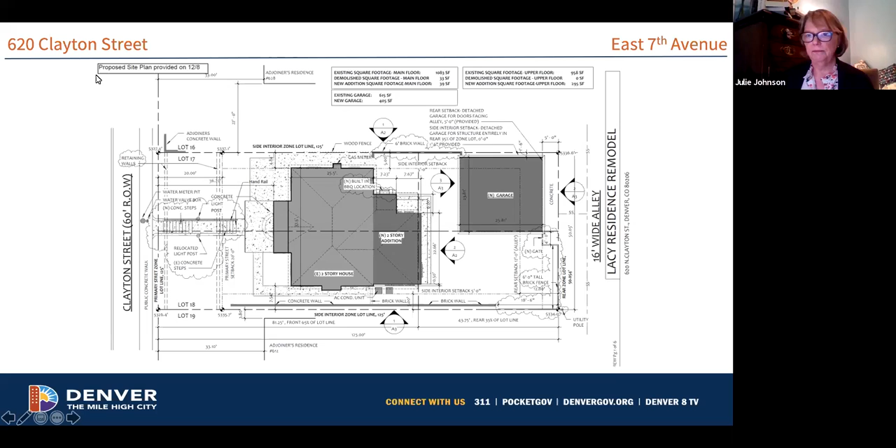Well, I just ask you to advance my slides that I put together. Is that it? Just to know the format here. I believe that would be perfect. Okay, yeah. Just tell me when you're up. I'd be happy to go through them. Let me, I've got it here somewhere.

Okay, very good. So that's just my name and the address here. So let's go to the next slide.

Overall, we're really proposing very minor changes. This particular project I've been working on for over a year. I've had people look at the front door trim and match it with as much detail as possible from the available material and what they're able to manufacture and build. So that's part of the diagrams that we propose.

The front door is very historic in nature. We are proposing a different design. It's hard to tell if the door was original or not, I really have a hard time assessing that. But the interior of the door has shown a lot of wear and tear, and there is a lot of wear on the steps and the concrete path. There must be 20 or 30 cracks. Some of the lips on the stairs are broken, and so it's reached a point where it's really beyond repair.

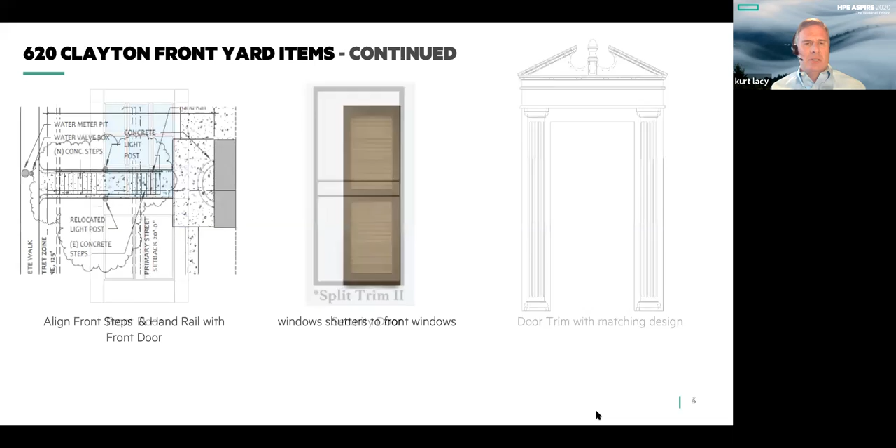This kind of summarizes the project, what components we have. We have the front door, the security door, and the door trim. If we go to the next slide, it just talks about the realignment of the steps and the shutters. And if we go to the next slide, this is focused on the front door.

So if we go to that next slide, that front door has a lot of repair to the cracks and to the broken glass that's in it. It's reached a point where it's in very disrepair, and the door trim has been rotted from the water damage that's seeped in from the top.

So the front door we're proposing is a very historical door. The reason why the interior designer chose the 9-panel is to match the current window panes that Brittany showed at the beginning of her presentation, to match the same window pane structure of the windows with the door front. And so this provides the detail of what that new door would look like on the right-hand side, and the jamb location and detail. If we go to the next slide...

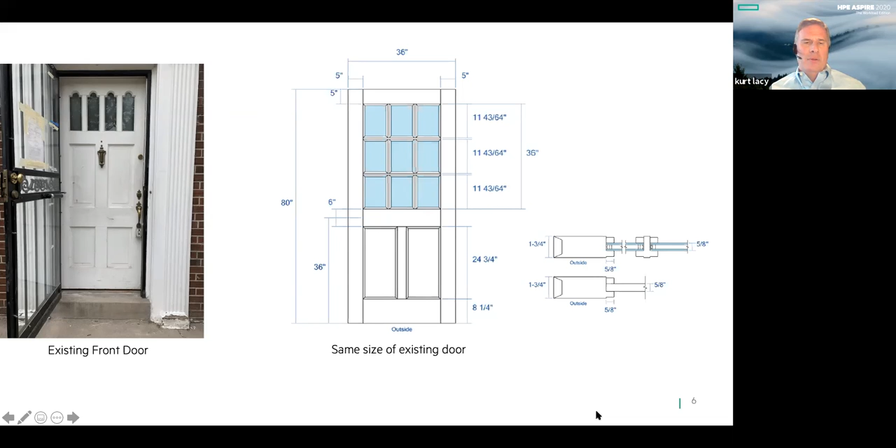This will focus on the security door, which we won't spend much time on, but I think it meets the historical nature of the door, right? Today the door is very obstructed from the current security door, it's very hard to open because it's mounted on the inside of the frame. So the new security door, just a door to protect the wood nature of the door, will be more open and visible from the street, so it better matches what the commission would like to see.

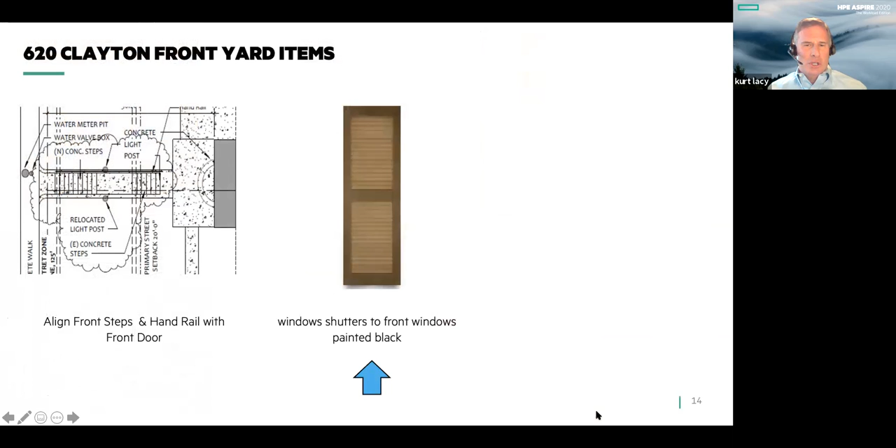Okay, if we go to the next slide, this is just the wood shutters, which would be painted black to fit the front. If you go to the next slide—I don't think I even have another slide. That's really it. Thank you.

I really appreciate the opportunity to speak. This project is really at a point where we need to make a decision to move forward or not. If we don't get approval, we'll probably just leave it the way it is. We don't really have time to continue delaying the project after working on it for over 3.5 years to try to live in the house in the neighborhood. So it's reached a point where we need to make a decision to move forward, and we hope the commission will approve this as an enhancement to the rotted and deteriorating materials in the front yard. Hopefully you've seen that we've done a good job of trying to match the current materials that are there now. Thank you very much.

Sorry about that. Thanks, Kurt. Commissioner, I know—we all need that mug.

You're on mute. Commissioners, do you have any questions for the applicant?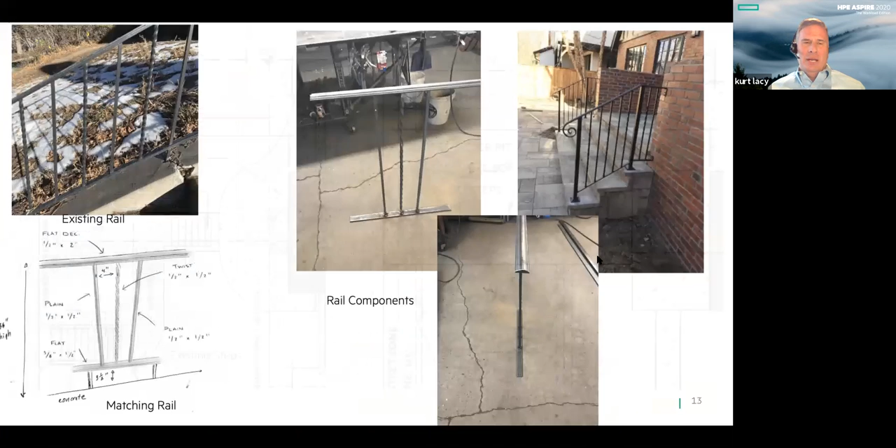Yeah, I do. What's your reasoning for straightening the access steps instead of keeping the dogleg jog? Well, it's just all cracked and deteriorated, and it's very inconvenient to walk up the steps, jog over, and then walk up again. So it made more sense, since we had to replace them anyway, to straighten them out to help facilitate easier access to the front door. It's really hard to shovel that one section—it has rails on it and you can't push the snow across it. It's all cracked at the jog over. It just provides a cleaner look in the front of the house with a straight access.

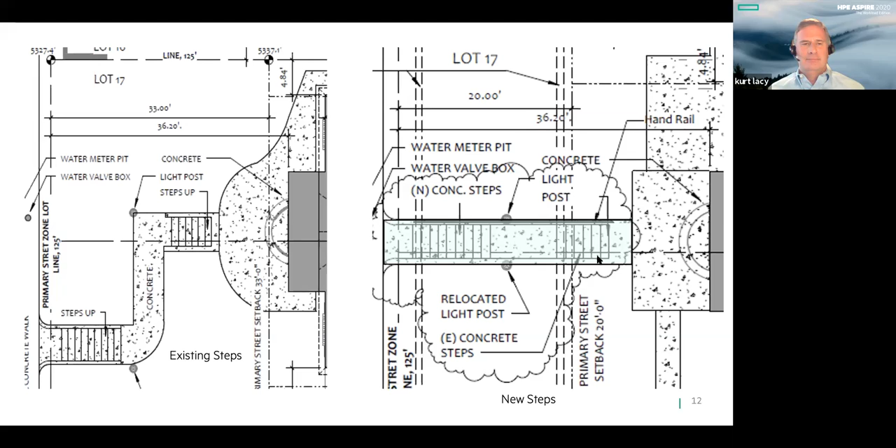Okay, thanks. Anyone else, commissioners? Any other questions for Kurt? All right, I am seeing no other questions. Brittany, did you have any redirect?

No? Okay, great. Jen, this would be the point at which we have comments from the public. Has anyone emailed you? No one's raised their hand. No comments from the public.

All right, okay, then commissioners, it is time to deliberate. So what are your initial thoughts?

Can I ask a question of Brittany at the beginning of this? In a case where there's a dispute, who makes the ultimate judgment about whether an element can be repaired or needs to be replaced? And I'm thinking about the doors and the surround.

Usually that's the commission, but usually we just require a little more evidence to verify that that element does have some damage to it. The applicant mentioned that it's pulling away at the top - I don't have any photographs documenting that. The applicant mentioned for the door that it is cracked in several locations - I don't have any photographs documenting that. So usually it's just more photographic evidence verifying what was presented by the applicant today, that those elements are damaged. That's just something we don't have in this application.

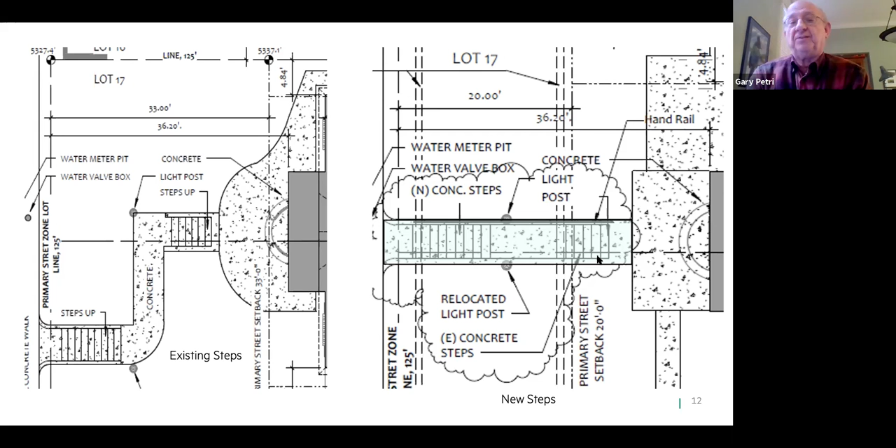I think my biggest concerns about this are the replacement of the door and the surround. If the surround is in fact as deteriorated as expressed, it can be replicated in exact detail because we've got the existing surround - measured drawings can be made, and all the features of that existing surround can be replicated today. I think what's being proposed, at least what looks like what's being proposed, is what would be a stock item, maybe with some modification. From the drawing that's presented, it just seems to be of much lighter character than the one that exists. So if we were to approve the replacement, in my mind, it would have to replicate what's there exactly, and this current submittal does not advocate for that.

So I agree with the staff's recommendation for denial. The same thing would be true for the door. Even if the door is damaged or deteriorated to the degree that it cannot be adequately repaired, it can be replicated. I think it's a unique door and it's part of this building's history. The proposed door doesn't even seem to be stylistically appropriate for this building, so there's a problem with that as well.

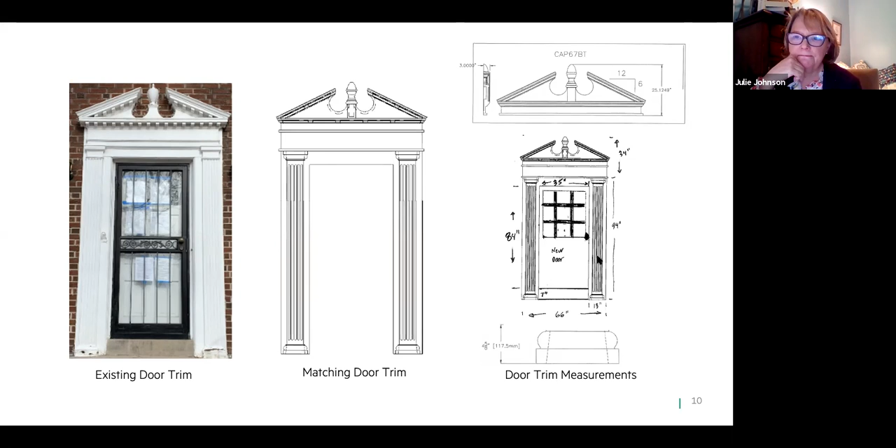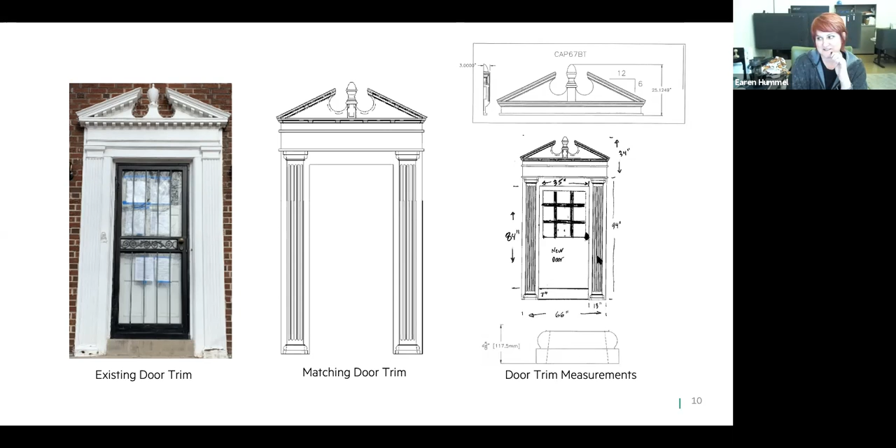Earen, did you want to talk about the landscape, the change in that? Yeah, I was going to comment on that. I understand the rationale for wanting a straight shot sidewalk, but it's very distinctive having the dog leg, and it will change the character. It's not necessarily a hill I'm willing to die on, but I appreciate the intent the original designer had - that it's not a straight walk up to the house, that it makes it almost like it's a fortress up on a hill rather than it's accessible, but that's just me. Yeah, I kind of thought that was a shame, but I too understand the intent.

Other commissioners, other thoughts, please? Brad, Ann? Yeah, this is Brad. I agree with Gary on the replacement. I think the pediment surround and the door are the two areas that I'm most concerned. And I think the guidelines are pretty straight there. So, 2.12 really talks about the replacement must match the original design.

And so I think, as everyone said, some of those pieces may be off the shelf pieces, but there are people out there that are able to document that and design it as it is. So I agree with the staff's assessment. I do as well. Erika?

I would just add to that - again, having some documentation that just shows the true deteriorated condition of the surround and door would help with reaching a decision. Yeah, I agree. I don't have any issues with the replacement as long as it fits the design guidelines, but further documentation on the actual deterioration - I think we would need to have that for the record.

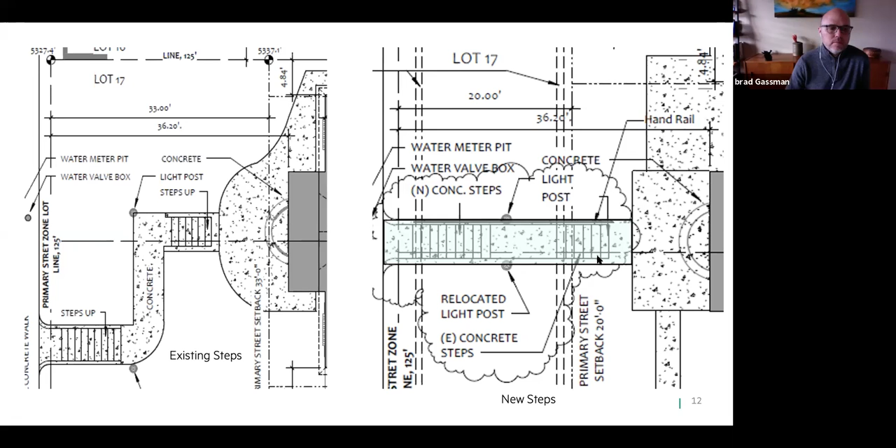Is there a second? I second. Brad, thank you. All righty, let's do a roll call vote then. Jeanette?

I'm sorry, I just was wanting to make sure that the citation to 5.3 was correct still, given that I think the sense of the commission was that the site work was okay. Oh, that's a good catch, Jeanette.

Should we, are you offering an amendment? Yeah, are the commissioners okay with the site work? I see a lot of nodding heads. Okay, so Jeanette, could you offer an amendment?

Well, I will offer a friendly amendment that the mention of design guideline 5.3 be removed from the motion. Anne, do you accept that? Oh, Brittany has her hand up. Brittany.

So I'm not sure if you want to conditionally approve this, with the condition that the site work is something the applicant can move forward with, and then change the motion entirely, because the discussion was that the site work may be appropriate and the applicant did provide the existing site plan. So I don't know if that's something you want to discuss. So we may want to do two different motions. Is that what you're looking at, Brittany?

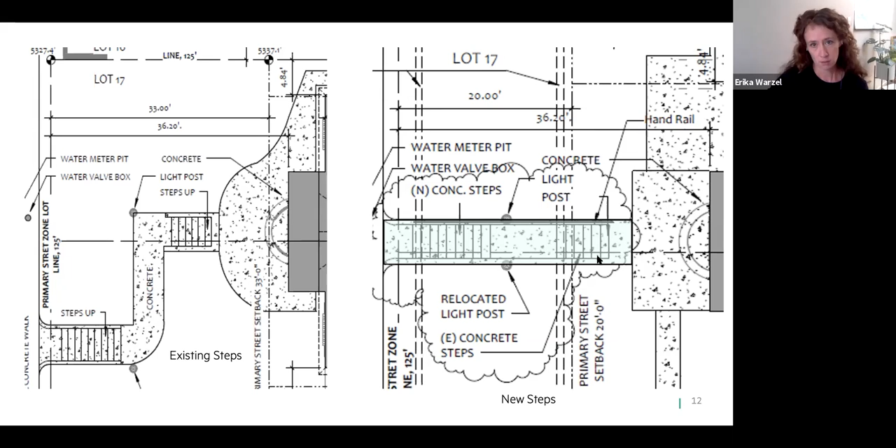So I guess I'm just wondering if we actually have the information we need for a determination on the site work. Are you referring to the retaining wall on the south side of the site in the side yard, or is there one in the front? There are two in the front. There's two in the front.

Okay, so those have not been approved to my knowledge, but I can double check that right now. Okay, that'd be great, because they're gonna have to pull a permit for retaining walls.

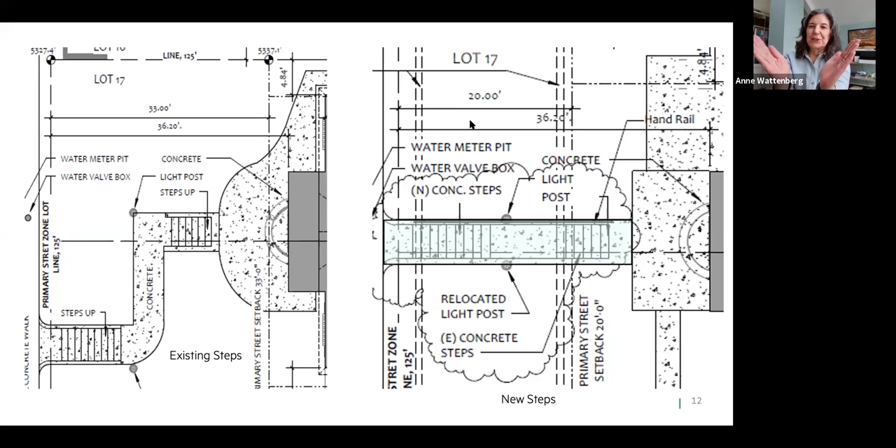So can I say that I assume, I think that we need more clarity about the handrail, because the handrail, we've seen only three pickets to it, and it has kind of a triangular piece. And my question is, I assumed that when we were doing the site work features, we would see more information about what happens when there are nine of those. I mean, I just don't understand them. And the applicant said that one of the reasons he's changing it is because it's not code compliant, and I'm not quite sure why this one is more code compliant.

So in the same vein, in our defense, we actually never saw the original site plan. And I understand that that was a late addition that came to us late, but that's one of the reasons why I would prefer to leave the site work in. It can be submitted exactly in the dog leg, but that's not precluded from what we're seeing. It's just that we need more clarity on it.

So Anne, you're saying that perhaps we should leave that component in the motion as it stands. Okay.

For the record, I think the railing looks acceptable to me. I can see where it wasn't code compliant before. And I don't know what triangular piece you were looking at, Anne.

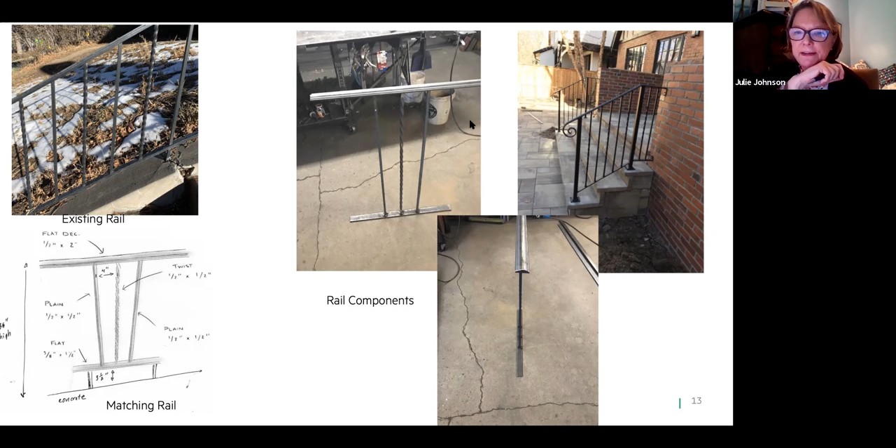So it's looking more and more to me like we would go forward with the motion that Anne originally made. I see some nodding heads. Does that mean I should withdraw my friendly amendment? Is that how we work procedurally? Yes, can you withdraw? I think you have to officially. Okay, I will withdraw my friendly amendment.

Okay, thank you. All right, are we ready to go ahead and vote then? We'll do a roll call vote. Jeanette? Aye. Brad? Aye. Aaron? Aye. Gary? Aye. Erica? Aye. Anne? Aye. And Julie, I will vote aye as well.

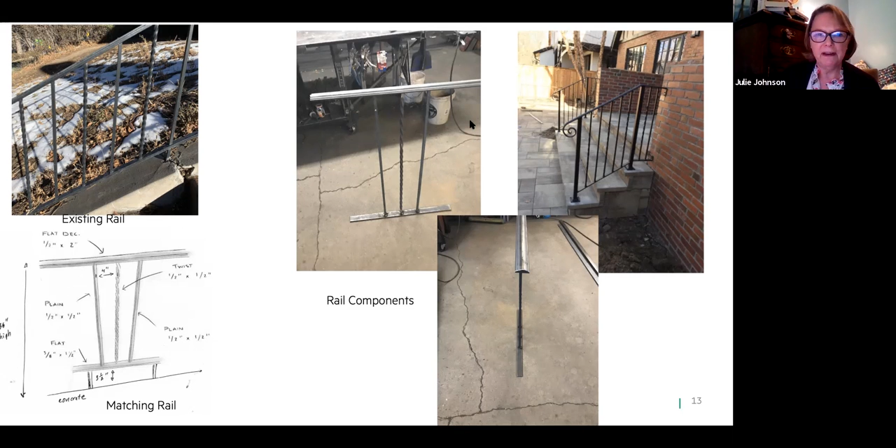All right, Brittany, the applicant can chat with you about how to come back to the commission, should they decide to. The motion passes. Thank you very much, Brittany. You've had kind of a long day, Brittany. Thank you very much. At this point, we now have a discussion item, and I believe that's Jennifer.

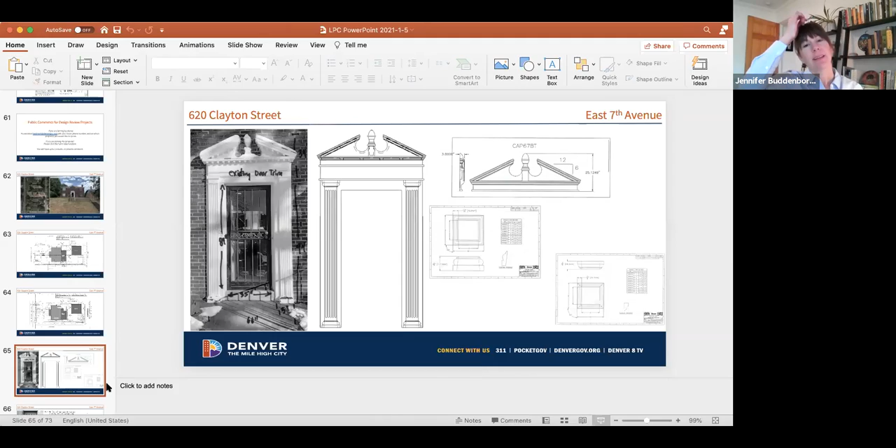Hi, everybody. Hey, I think, oh, there we go. Perfect. I think maybe I should have just asked Brittany to do my presentation since she was totally on a roll there. Yeah, she may as well. She's all warmed up, Jennifer.